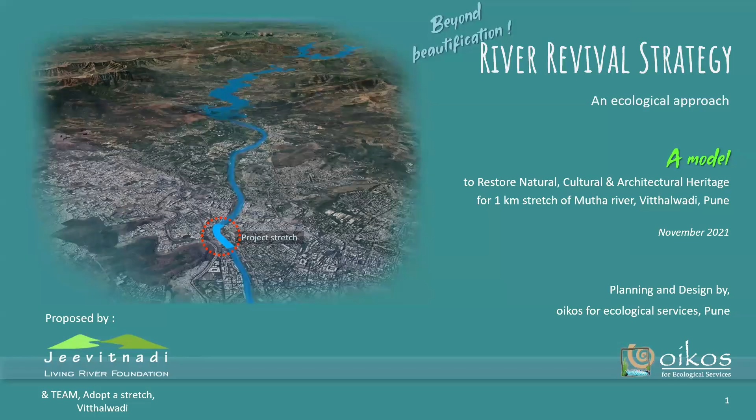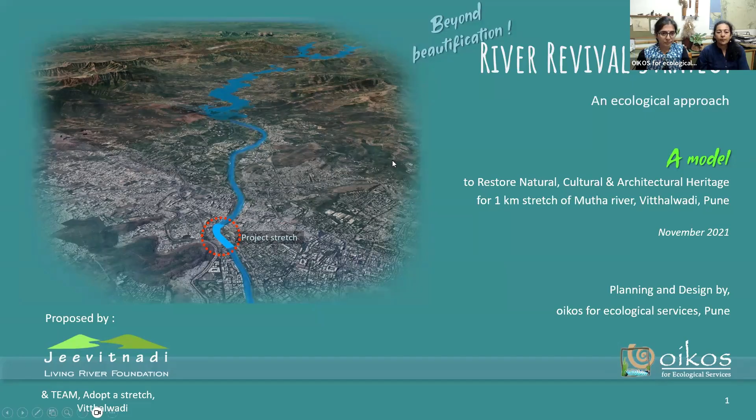So as Prajakta was briefing, this is about a river revival strategy with an ecological approach. What we're saying is that this is much beyond beautification, and we wish to show a model where we can restore the natural, cultural, architectural heritage of Pune for this 1 kilometer stretch that we had selected along Mutha River near Vitthalwadi. I think we'll skip a few slides because we have kept this entire presentation on the PRR website as well.

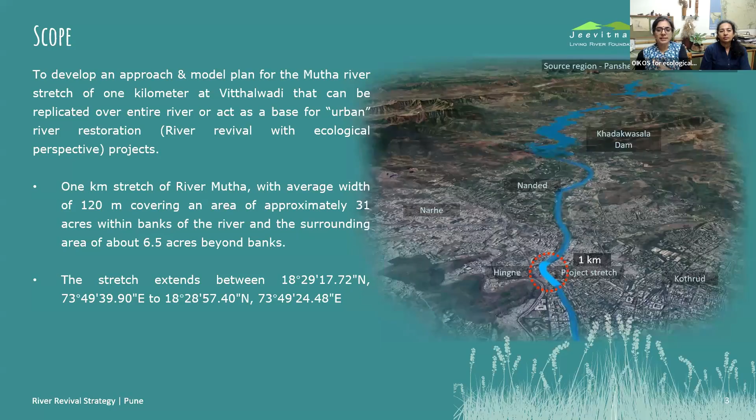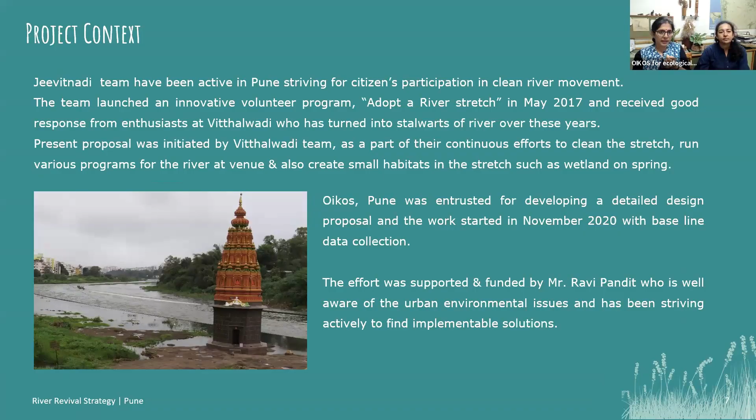This presentation covers some background and introduction, then why the river is important as an ecosystem. This is very important before we propose any kind of master plan, because once you have a very solid foundation in how you look at any particular ecosystem, only then are you able to design the right kind of strategy for its revival. Then we'll talk about the ecological assessment of that stretch, and then river restoration, which is a proposed design. I'll take you through the ecological assessment, and then Manasi can talk about the design. As I said, maybe I'll skip a few.

These are Vitthalwadi volunteers working at the Vitthalwadi stretch, cleaning, and along with Aditi and her team, we also tried to restore one wetland over there. It was a spring that was a little contaminated by the sewer there, and it was not reaching the river. So all these volunteers made it into a flowing channel, and it was nicely connected to the river. So this is one little habitat that was restored. If any of you wish to visit, you can visit this little habitat too.

So our vision basically is to consider the river as a natural entity, restore the natural zones of the river, and also restore the feeding streams, because that entire thing is basically a river ecosystem. The objective is to present a proposal for a river revival strategy based on an ecological perspective that includes these objectives. Basically 5 things are there: consideration of the river as a biological and living entity; stop, avoid, control solid and liquid pollution; restore the structure and functions of the river. Both things are very important.

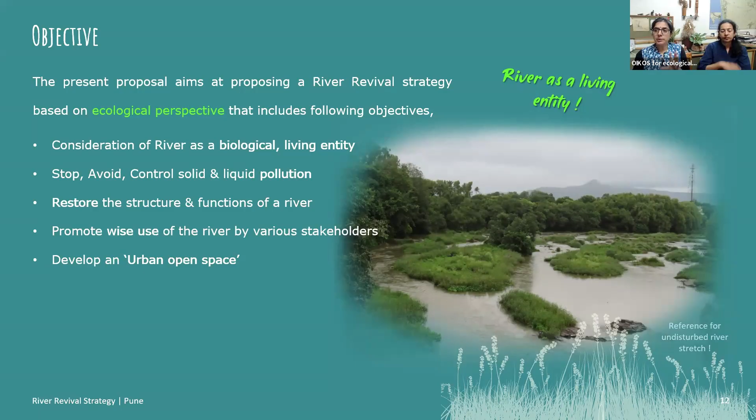And promote wise use of river by various stakeholders. That's also very important. And develop an urban open space, which is very important from citizens' point of view. And there would be n number of benefits for both human beings as well as non-human beings: education, recreation, reduced risk of floods, fresh air spaces, obviously natural greens canopy, and also this will be addressing some kind of climate resilience, because we are right in an era of climate change.

Yeah, so we studied this entire ecosystem over 6 to 8 months. We have literally made a grid along this 1 kilometer stretch, and studied the observations with respect to biodiversity along this stretch. So coming to this river, just understanding this as an ecosystem, it is connected to the source region, and also it is connected to the downstream. So these are basically 3 main zones: source, plains, and mouth of any river.

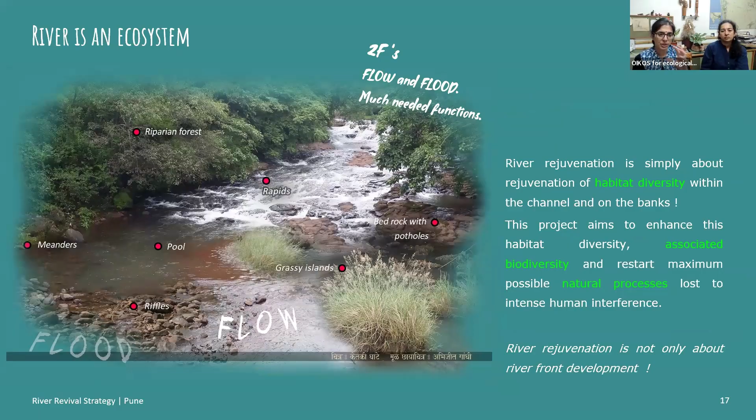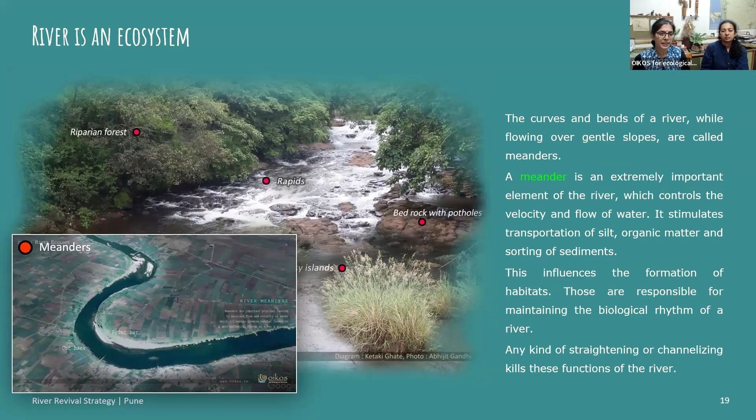And it is full with many such habitats as you see on this particular slide. So various habitats are there. There's a riparian forest all along the river. There are meanders. She carves out beautiful meanders on the plains. Then there are such kind of very tiny habitats like riffles.

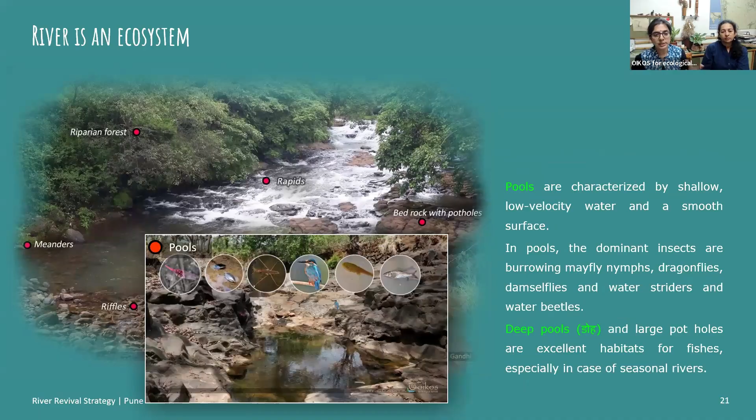And each of this gravel or cobble is very important as a habitat. Then there are pools, and they are full with n number of non-human beings. Then there are rapids, as you see in this photograph. There are potholes, there are wetlands and islands.

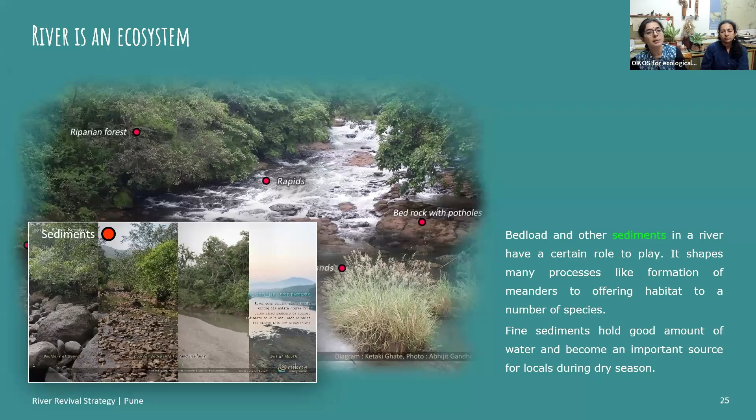So in short, any river is full with different kinds of sediments, sizes of sediments, and that's how you need to consider her as an ecosystem and then treat each habitat very cautiously. And that's why ecological assessment and analysis is very necessary before you go towards planning. So ideally, you can't really design one particular stretch of a river, but you need to design a policy and design for the entire catchment actually.

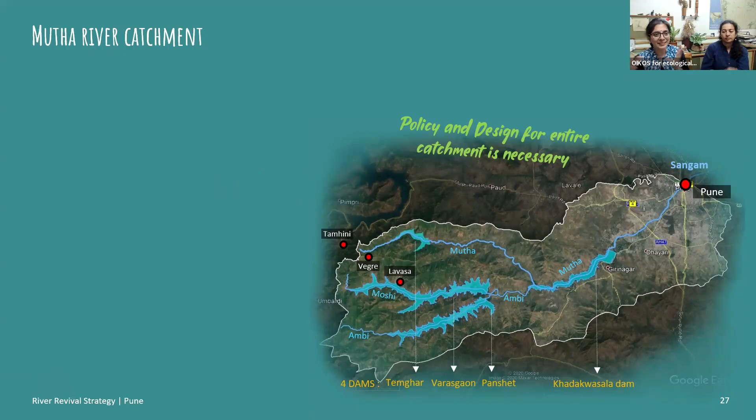But whatever, we have only this river, and that's how government looks at it, a particular section of a river. So looking at Mutha, it originates in Vegre village in Western Ghats, and it meets River Ambi near Dauze, and then it goes into Khadakwasla and ultimately enters the Pune city limit.

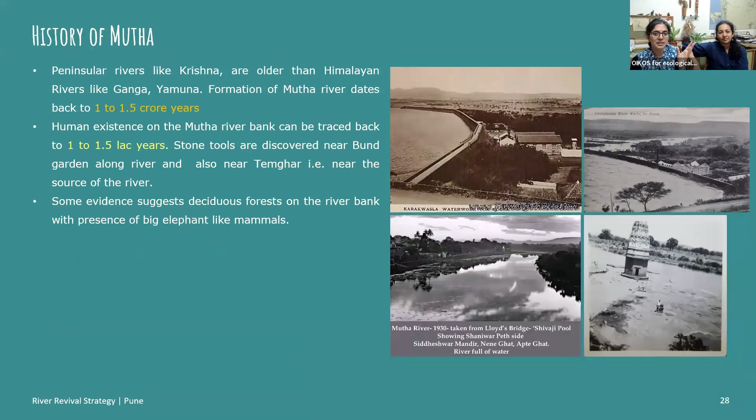So I'm going to skip these few slides again, the history of Mutha. So Mutha is a very old river. You can read many interesting stories about the history of Mutha, if you wish to add anything to this. Yeah, so as you said, it's a historic river, and it was instrumental for Pune to be Pune. So that's what I just wish to add.

Okay. So then the transformation from the origin of the river till the urban landscape is very, very stark. Up there in the source region, in her catchment areas, it is fairly clean, I must say. And as she enters the city, it starts getting dirty, and even the solid waste gets dumped here. So obviously there is an urgent need to repair this, and obviously there is also influence of the dam. It's a completely different subject though.

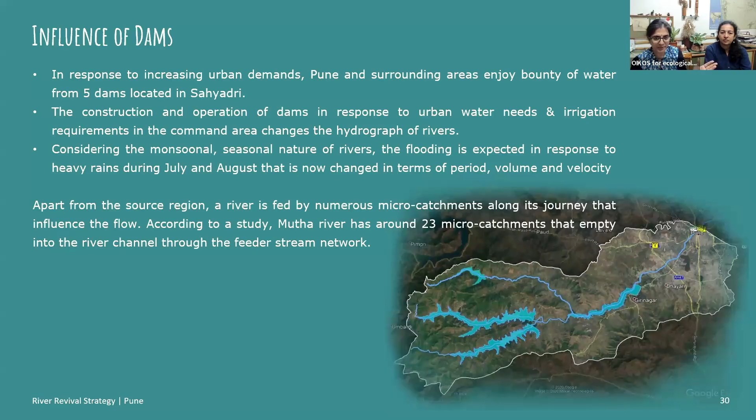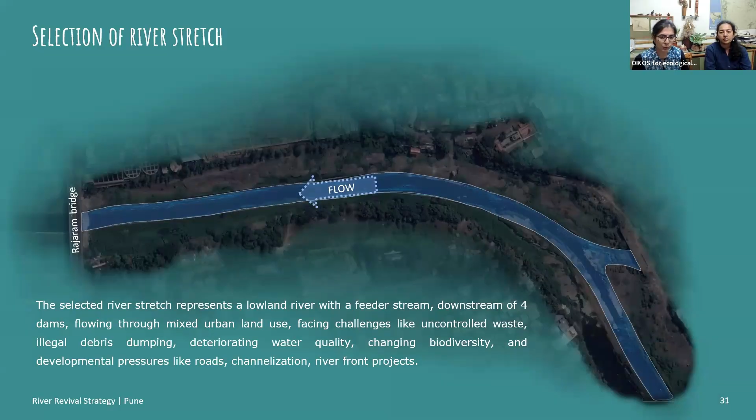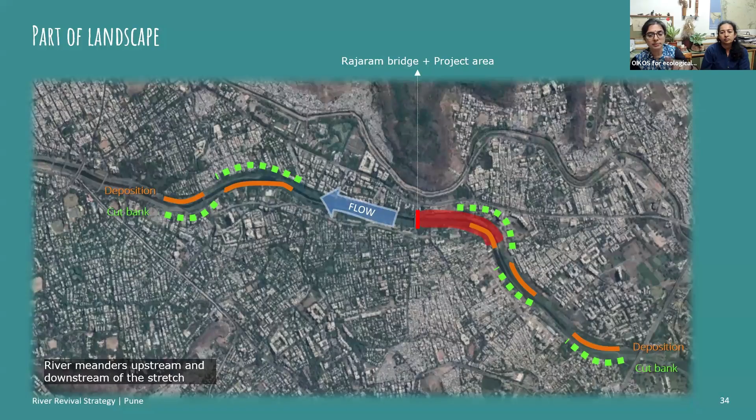So coming to the selection of our river stretch, this is Vitthalwadi stretch. You can see Rajaram Bridge on the left hand side, and this is how the flow is. So these are actual banks. This is eastern bank and this is western bank, and we did this assessment over 6 months. So it's very fascinating to look at the historical imageries of this particular stretch. You can see all these green dotted stretches, we call these meanders, and this red is the stretch that we studied.

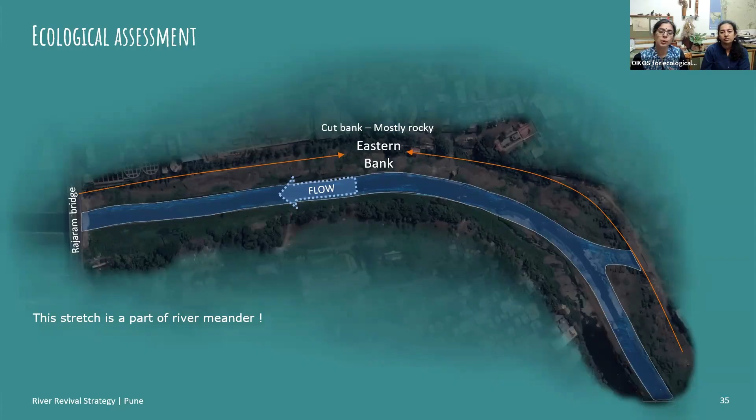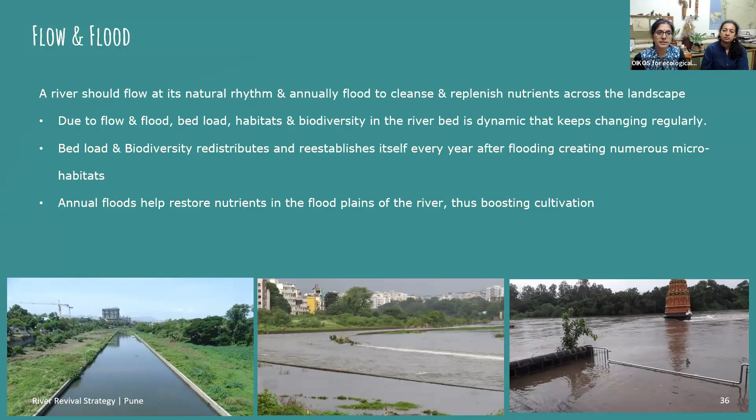So if you see, we call this cut bank. So the outer bank of the river is called cut bank because the flow keeps on eroding that particular side, and it deposits on another side. So that's why it is called depositional bank. So flow and flood both have been basically shaping this kind of channel over years. And this is a very stark difference.

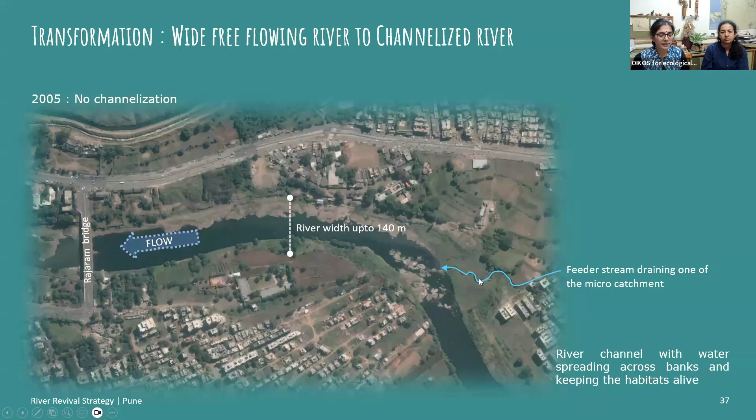So in 2005, you can see there was no channelization and river width was almost 140 meters. There was one feeder stream here and maybe some kind of rocky boulders. All these various habitats that you can see were alive. But in 2009, partial channelization was done and 140 meters was constricted to 30 meters, right? And here there's one wetland which is of 70 meters almost. Yeah, even then this was yet to be channelized.

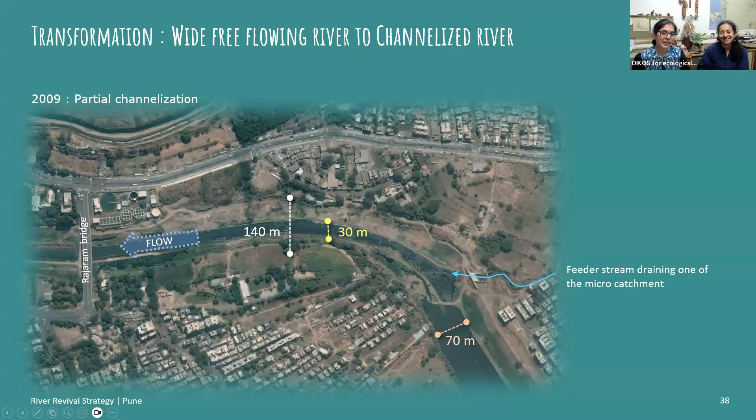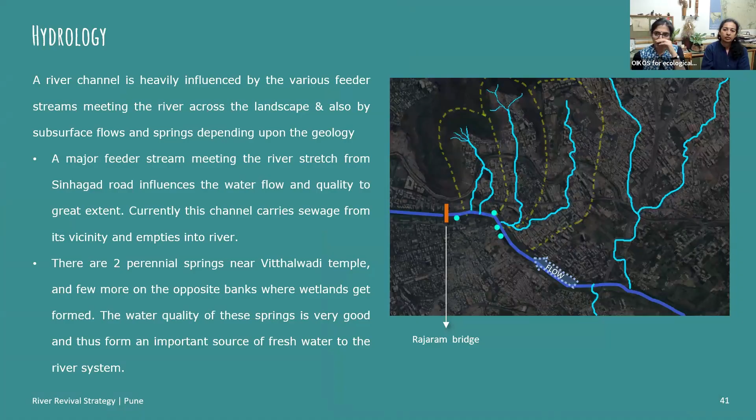So this is what the channelization has done to the river. Earlier, the river was full of habitats, now just one particular channel. And the rest of the habitat obviously became dry. So this is what the hydrology is. There are multiple streams and springs which are meeting this particular stretch.

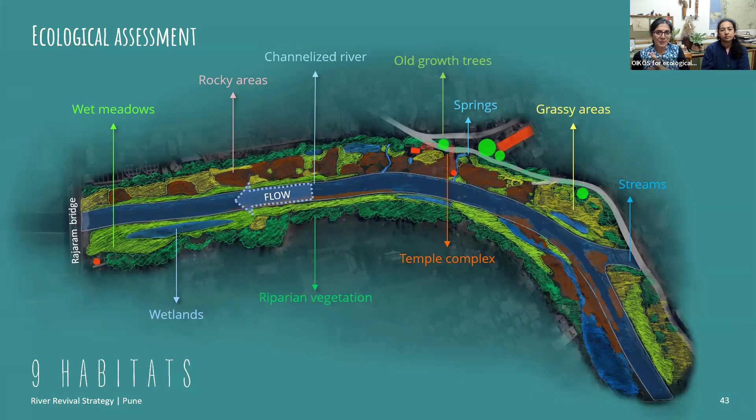So just to add, this pied kingfisher is seen in very few stretches. You can't see it in very heavily polluted areas. Though this part is polluted because there is a good amount of population upstream, this is not seen everywhere. So some indicators are there beyond whatever pollution is there.

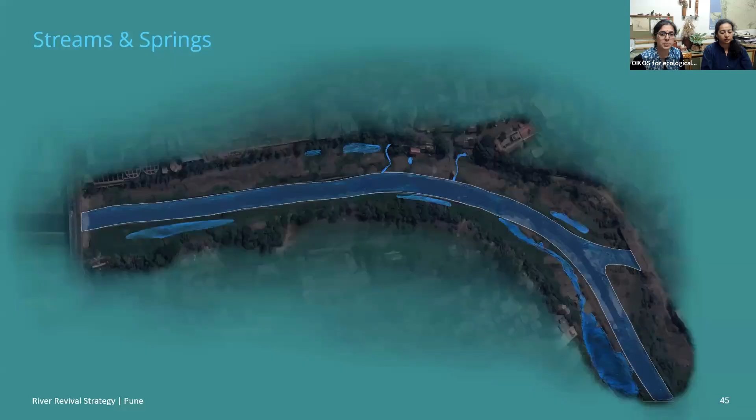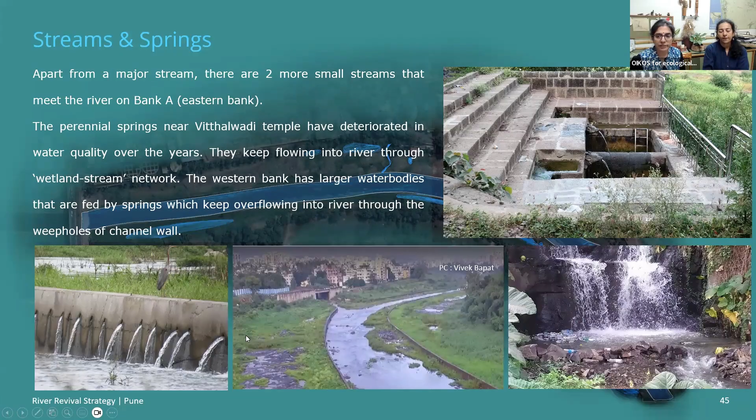Then there are streams and springs, as you see in this image, and they're a very important part. And this was the kind of kunda which is there just outside Vitthalwadi. And as I was telling you, along with Aditi, we tried to restore the wetland below this. And these are the weep holes that you see. So all this definitely can be restored.

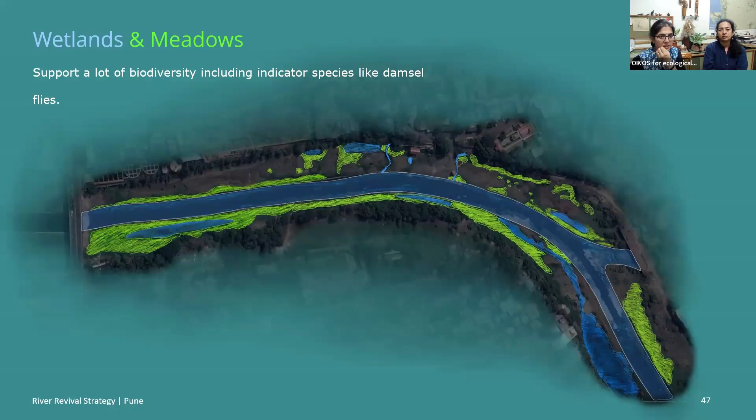And this wetland and meadows are together actually. So whatever shallow water body is there, right now it is colonized by certain plants. As you can see in this particular photograph, polygonum is one plant, in Marathi it is called paral, which is most dominant here. Actually, this can have a diversity of plants, and that's what restoration is. Restoring all that diversity becomes our objective.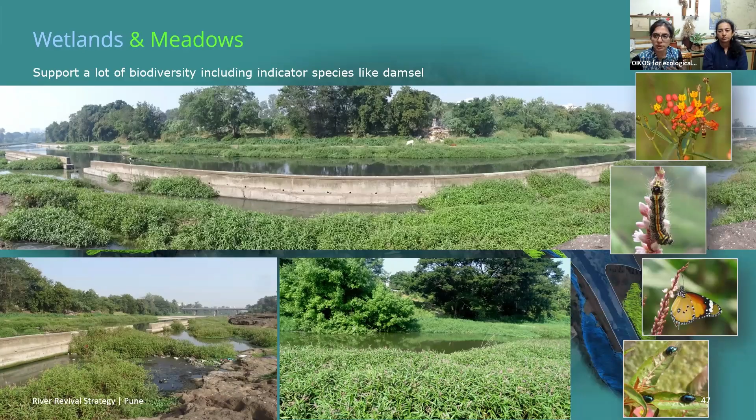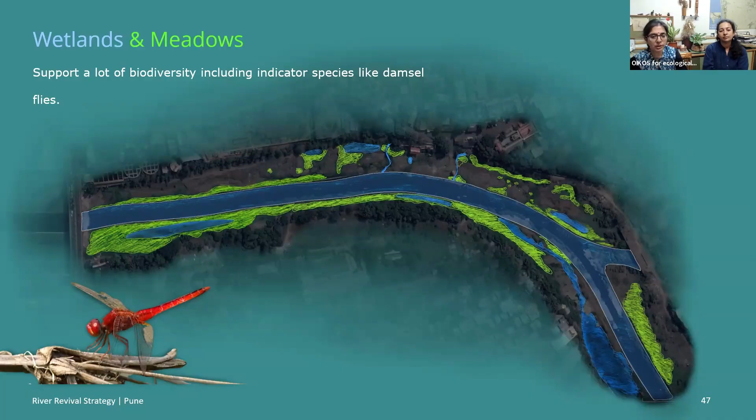And right now you can see much of the fauna, beetles and caterpillars. This first photograph is Halad Kunku. It is also a milkweed, which is supporting some kind of tiger butterfly. And certain dragonflies were also there. Dragonflies, we say, are a good indicator. They are actually the apex predator in any water body. If they are there, their larvae also control the mosquito population. So that's why such animals are important.

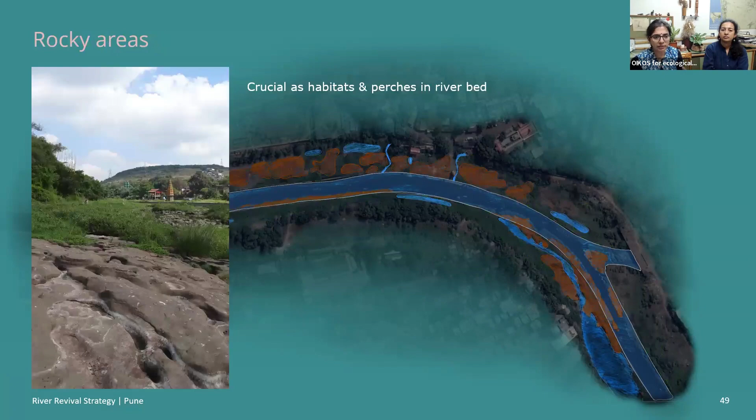And the rocky areas are there. They are also very crucial habitats and perches in the riverbed, and we could see many birds perching here. One of our team members got a wonderful photograph with a pond heron, a lapwing and this black-winged stilt in one frame, and even a little lower, a sandpiper. So the areas in between, which are like small rocky islands, are very useful for the fauna. Whenever there is channelization or high water, these habitats get submerged and then there are no such perching sites.

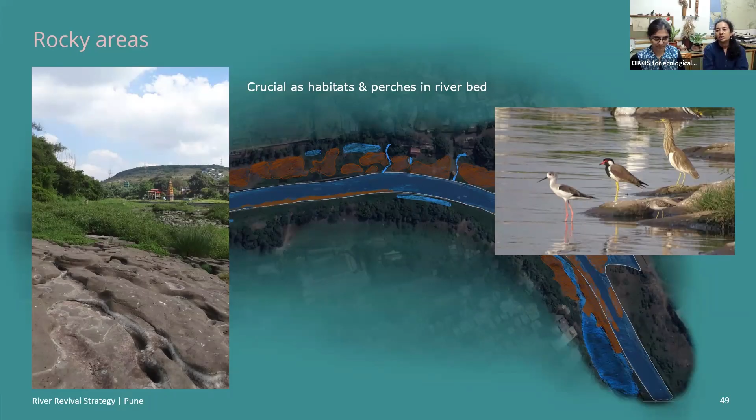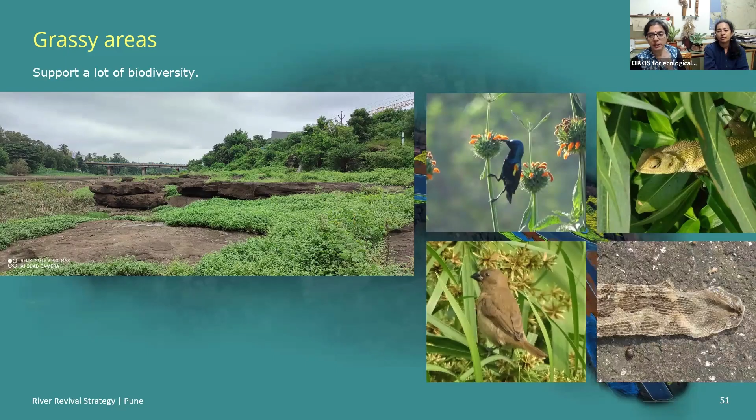And then the rest are grassy areas, and grassy areas also support a lot of biodiversity. As you can see here, birds are there and reptiles are there. Many are coming to feed on grasses. We have also spotted many snakes and their skins. So basically a lot of diversity is also there in these grassy areas.

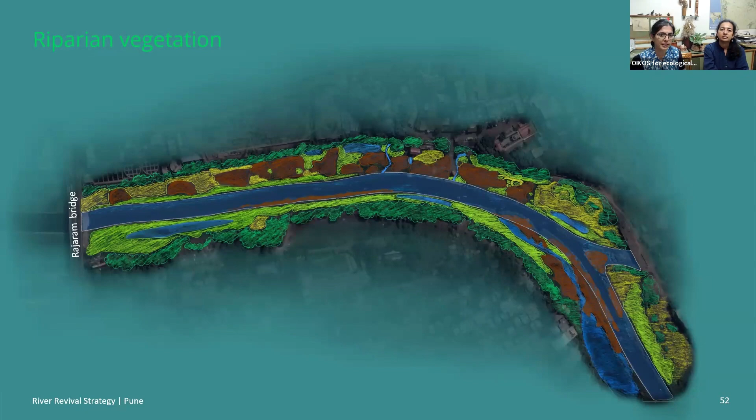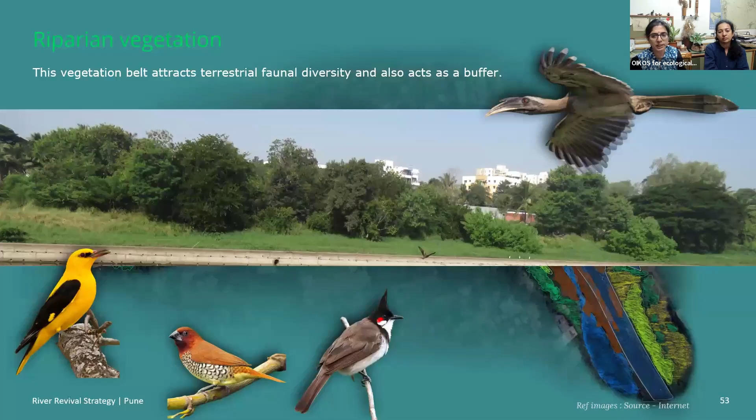And the last is this riparian zone, actually second last. Whatever fragmented riparian zone is there, we could see a good diversity of terrestrial birds like orioles, munias, bulbuls and hornbills. And in that there are also a few old growth trees, really large trees.

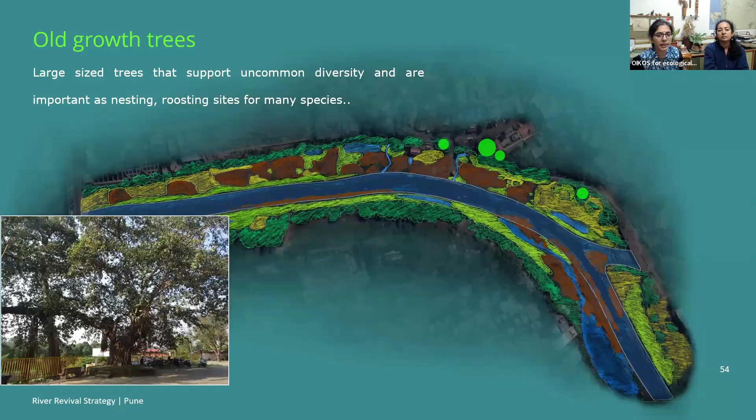Basically, umbar and pimpal are there, and wad, the banyan, is also there, and all these are almost keystone species. You remove them and you lose a great diversity of birds and other animals. So all these umbar and pimpal are there all along this stretch. We also could spot this Hariyal, which is our state bird. This is grey-fronted. Grey-fronted.

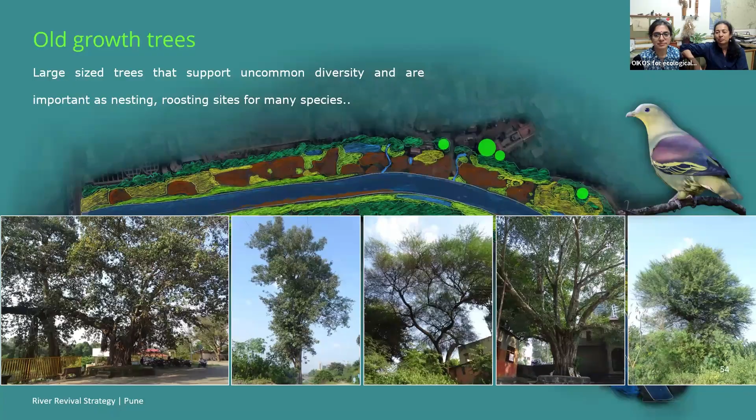So it's very uncommon to have this bird in our area. Fortunately, there could be some corridors which connected it to this stretch. So we were very happy when one of the team members from Jivit Nadi spotted this here.

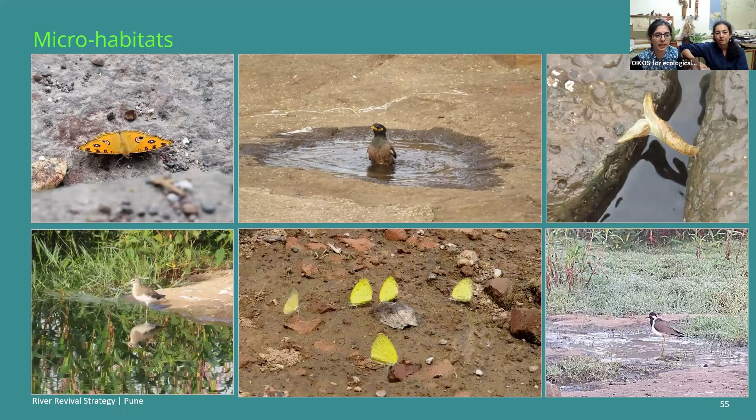And then n number of micro habitats are there. I think we can just go on speaking about the ecological status, but this is just to show you a glimpse of all the tiny habitats, whatever are there. They're full of diversity.

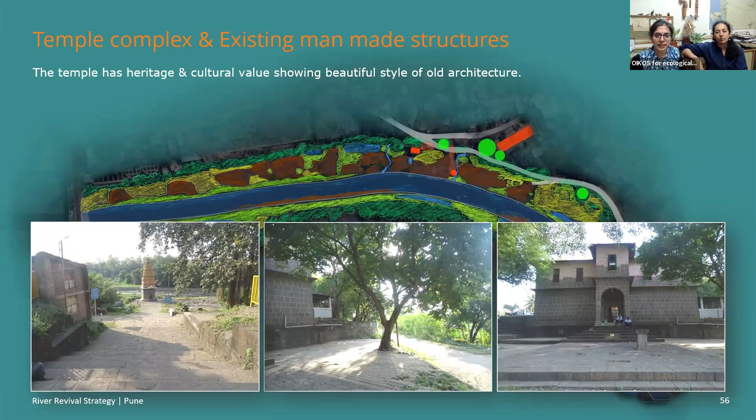That's what we are saying, that we need to actually mimic this kind of architecture along the river. Instead of completely new embankments, can we just mimic these structures, whatever are there, which are made out of lovely basalt dressed stone? This is the diversity.

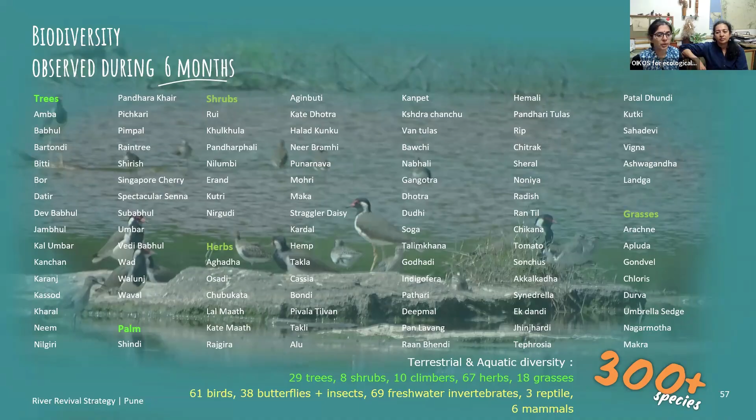Almost more than 300 species are spotted within just 6 months, in just 1 kilometer. So all the species are there, various groups, taxa, are written here, and these are all indicators, spotted particularly at this different habitat.

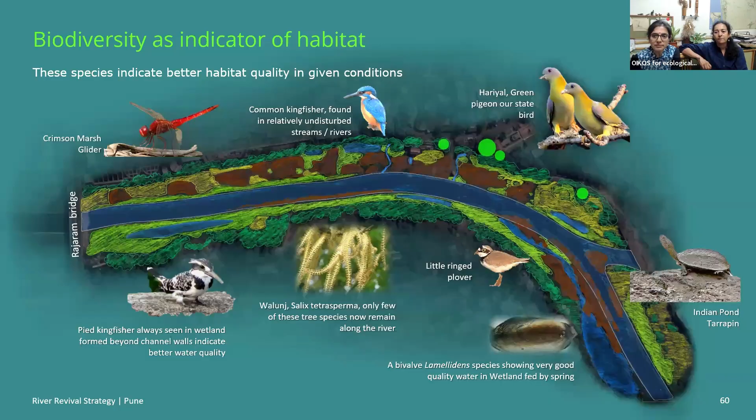So this is Hariyal. This is our state bird, actually. And then these are just certain documentation that we did while we were doing the survey.

And we also could document the human use. There are certain shepherds who also come during a certain time in the year, and they make their sheep rest there for a day or two, and then they walk away. Then there are dhobis who use all these rocks, and there are fishermen too.

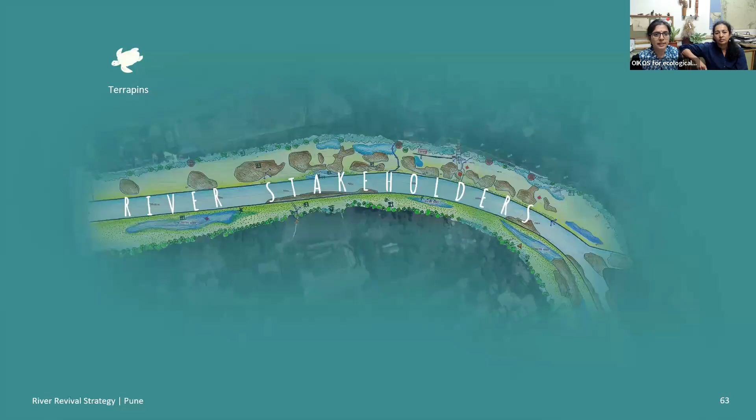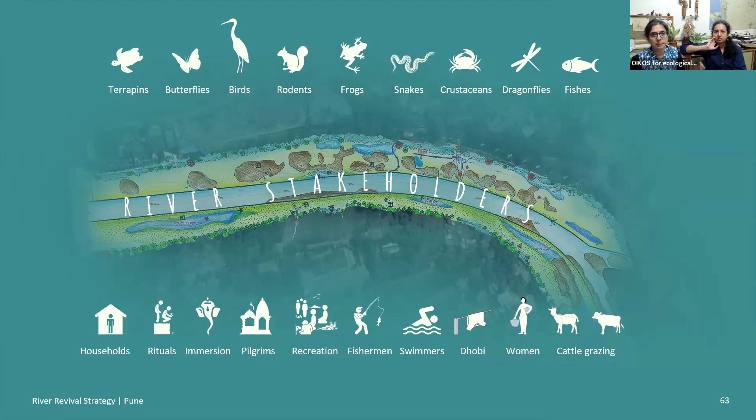So all these are also stakeholders, is what we see. So these are different stakeholders. All non-human beings are on one side and all human beings are on the other side. So we say that ultimately our design should be inclusive towards all of them. We can't really displace any of them, but make space and facility for each of them.

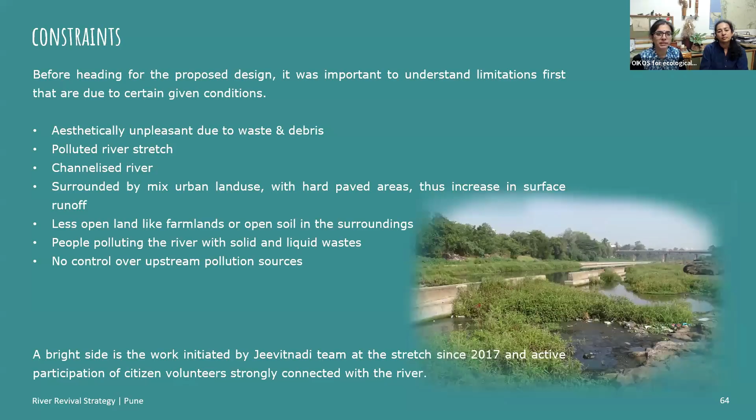And then there are certain constraints. This river stretch is already polluted, and from upstream there is a lot of pollution coming inside. So there is no control basically over upstream pollution sources. But even then, we try to develop some kind of a model stretch.

So from here onwards, we talk about the design, like what all things we consider. So after we took all the on-ground realities on paper, we also studied the DP and surrounding area - what is planned by the government, what is the land use in the surrounding, and can our design be in tune with all these requirements or whatever is given right now.

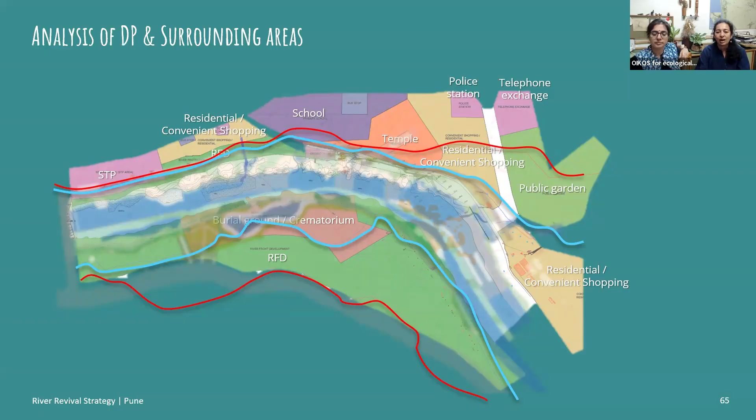So here you can also see the blue and red lines - I think all of you must be knowing about these, which are the 25 years and 100 years flood lines basically. We need to consider that also. We can't change them. Maybe there could be some deviation after 2020 or something, but that is yet to happen, so we can safely consider these lines right now.

So this is how the proposed design will look like. The main objective is clean and restore. So these are some of its sub points.

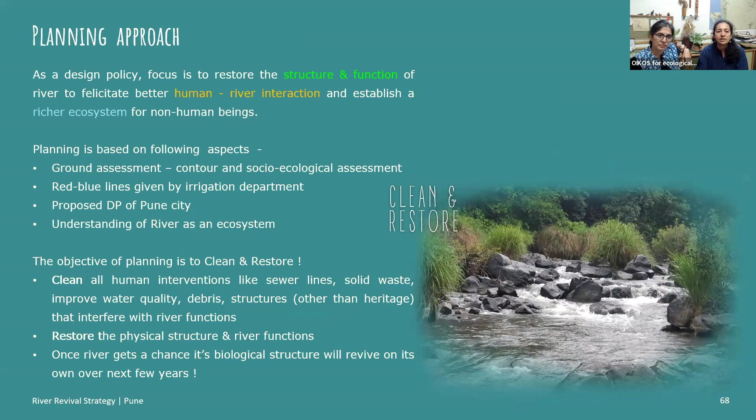The design emphasis is basically on maintaining the river cross section, so as not to reduce it, then have natural banks wherever possible. Now in the city we already have some constructed banks, but wherever possible we try to have natural banks. Then widen the channel, because the channel has been built inside and has restricted the river. We have to widen it so that the flood can be accommodated within the river channel, and enhance the citizen experience. So these were a few of the things.

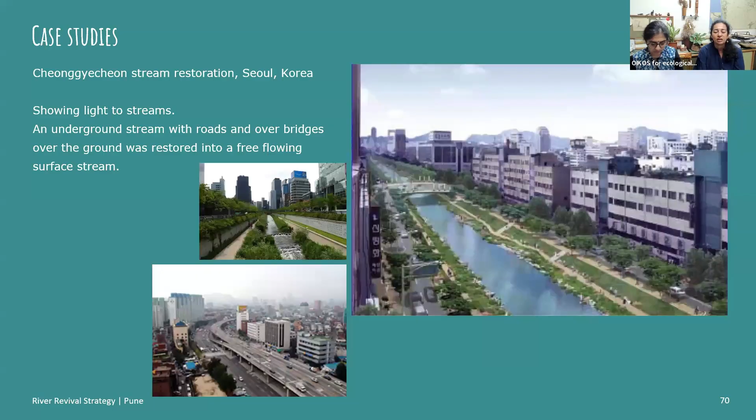We also studied some case studies from across the globe. So this is one stream restoration in Korea. You can just Google these things - I'm giving you some pointers, but beyond that there are many such case studies which are really good and show us the paths to work on these urban rivers.

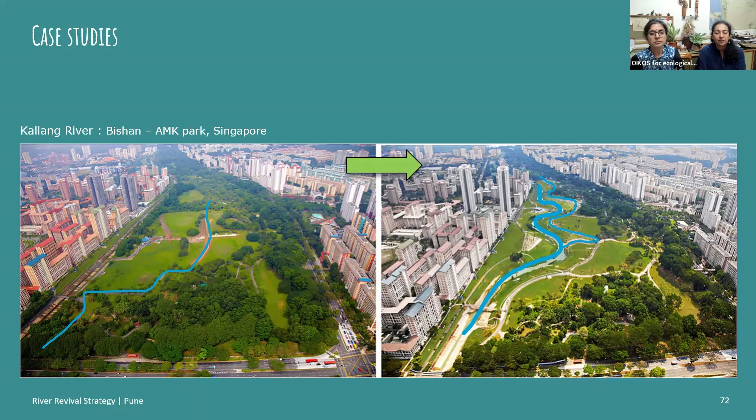So these were some case studies, and we could also enumerate various benefits of having such ecologically informed design.

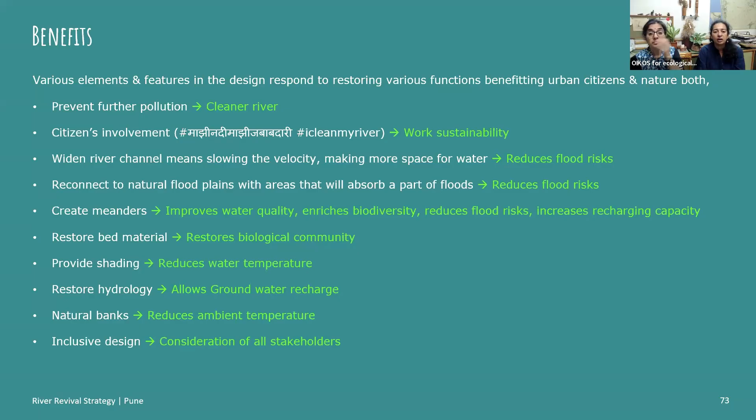In planning, we have considered these four river functions. First is respect the blue and red lines. Second is restore the physical structure of the river, then restore biological structure. One way is that when you restore physical structure, the biological structure can follow it, aligning itself within say 5 to 10 years down the line. But we can also accelerate it by certain design elements. Fourth is recreate the citizen access. So we'll see it one by one.

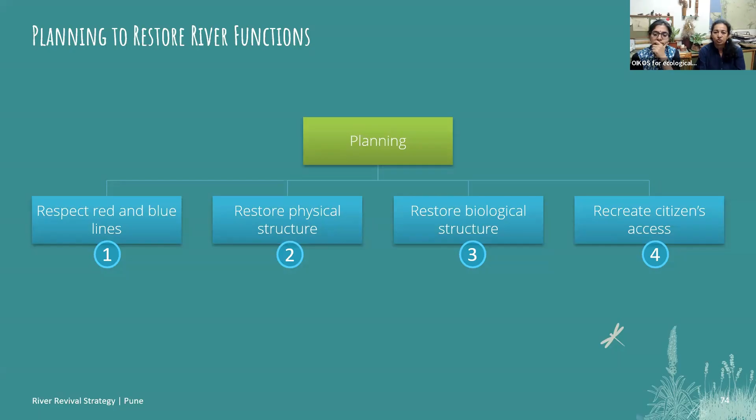This is the main thing actually in this design: if you look at the current riverfront development, it is accessible to citizens all along the river. We are saying citizens surely can access, but they can only reach the river through something like fingers, not all along the river. So most of the river is protected and some stretches are developed for citizens. That's the main thing.

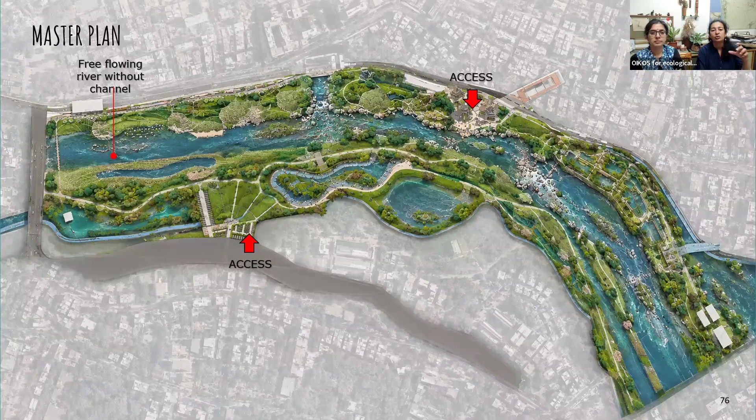Then we should have a free flowing river without a channel, so we can actually remove the channel selectively. That's what we have designed.

Then a pathway to walk all along—but this pathway is not a very beaten pathway like tar or cement, but more natural, connecting the rocky ways in between. Then we have waterfall improvement and wetland development, spring development, sit out areas, and we have separated two land uses here—both religious, but one for the temple and another for cremation. So we have separated those two uses.

Then riparian zone development, wastewater treatment, and wetland development within the channel. There is one stream coming and meeting the river which is really polluted, so having wetlands at the meeting point will be important so that we can treat that stream.

Then this is one wetland garden which can function as a flood control wetland. Whenever flood happens—right now whatever we are seeing in the river is flowing at its full capacity, not a flooded river, so it is flowing within its banks. That's the extent of our river actually. If we want to respect that extent, then it has to be at that point, and beyond that will be the flood. So whenever there is more rain, the river actually flows beyond its banks, and that is the flood.

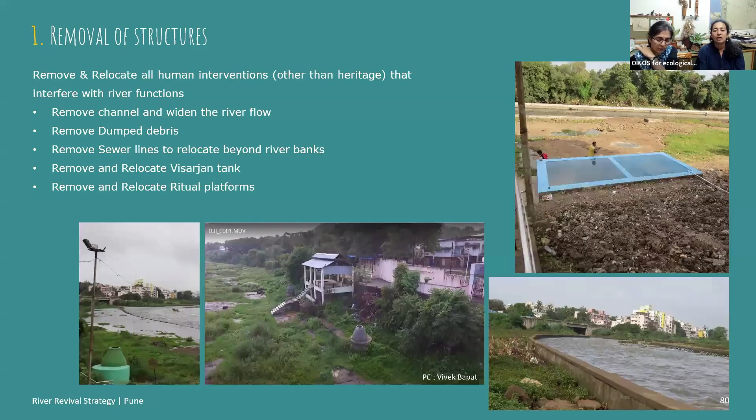So all these kinds of physical structures that have been added into the river bank should get modified, and we should have them relocated outside. Then widening of the river channel - right now the channel width is 30, and it needs to be widened so that we have access.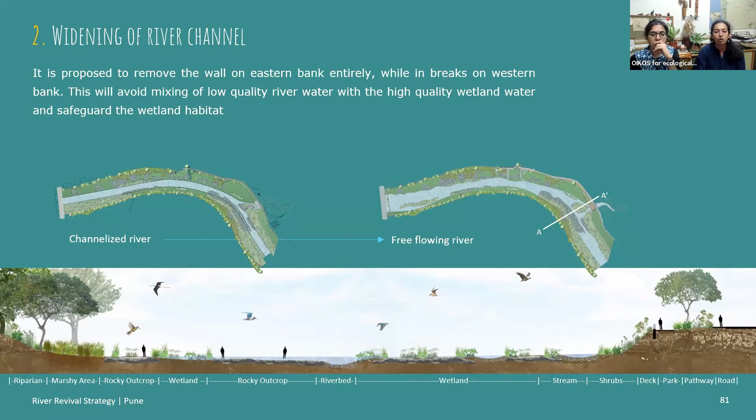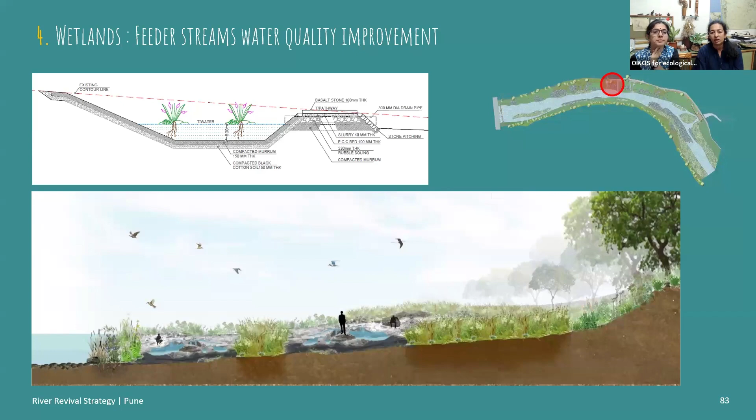Water is reaching the habitats, and also there is more area for the water to be accommodated. Then this is solid waste management at the mouth, at the meeting point of the stream, and at the Rajaram Bridge where people tend to throw things. Then this is a small feeder stream that comes in, where we can have water quality improvement techniques by creating wetlands and treatment areas.

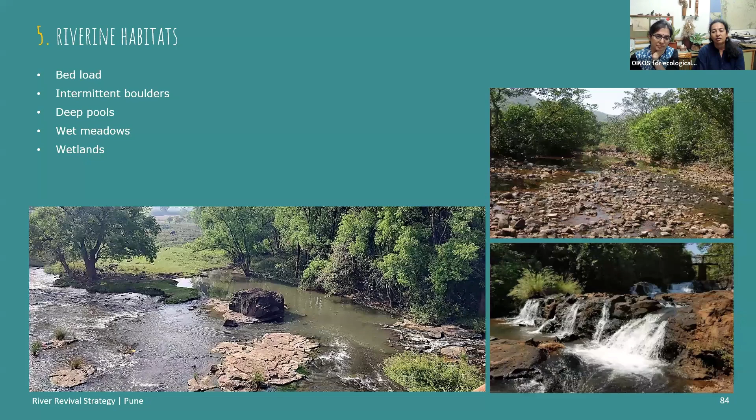So this is how these in-stream wetlands may look like if they are created. You can also see the pathways basically need to be very natural. So detailed designing is again a completely different task, but this is just to show you how you can develop a river in an ecological way. And these are almost 4 acres of riverine habitats that are in place in the design basically.

Then the third point is about restoring the biological structure, like developing the riparian zone. Right now, if you can see, this entire stretch is one riparian zone, but it is discontinuous - ahead of this you can't see any riparian zone, and here you can't see any riparian trees. It is discontinuous and has some non-natives also, so we can have strategies to replace them and plant the right kind of riparian species.

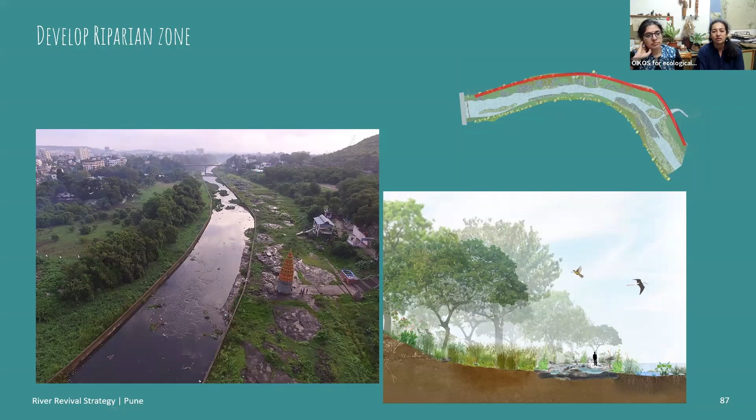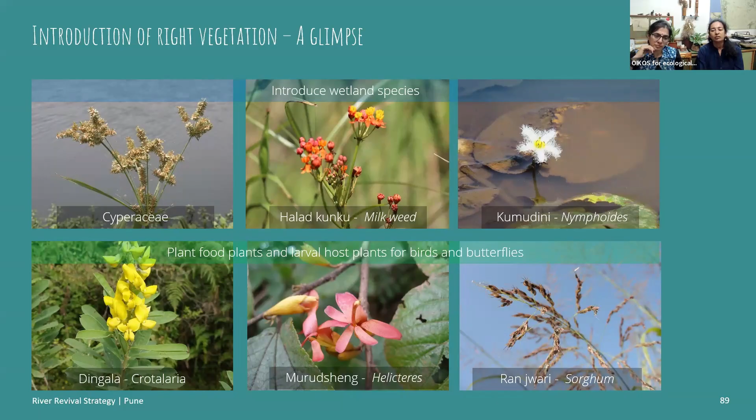So these are a few of the riparian species that can be introduced and planted here. Then we have the right vegetation not only at the edge but inside also, in the wetland areas or within the channel - some grasses, some sedges, some herbs that can also be good for the local fauna.

Then, recreate access for citizens. That's a very important point because it's an urban river, and we have been hearing mainly that since it is an urban river, we need to have citizens experience it, we need to have some open spaces within the urban areas which are very densely populated, so that people can have good recreation facilities.

So this is how we can actually connect people to the river, because unless we have people coming to the river, we can't expect them to work for the river. That's one of the key points with which the Jivit Nadi team is already working on - connecting people to the river, and then we can do certain conservation activities.

So these are certain points that we thought of including in the design. One is the temple complex with ghats, that needs to be maybe redesigned to have certain activities. Then a wetland park with amenities, that is on the other bank. Then a trail along the river which will connect the river to the citizens, and they can also enjoy the fauna coming in, or enjoy bird watching and all those things. Then a wetland observation area, a river crossover ford.

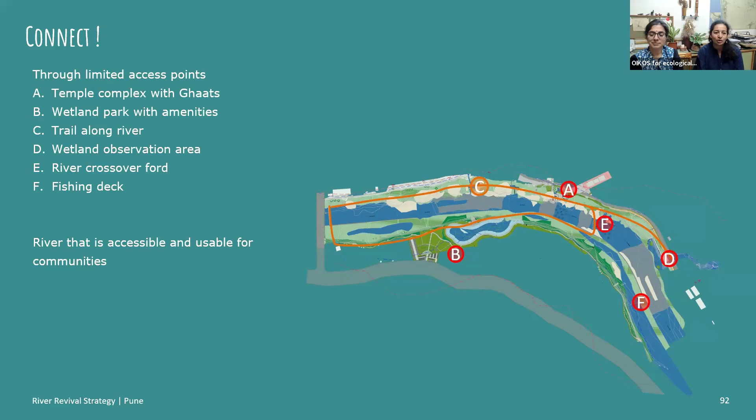So whenever there is low water in the river, like in the lean season, people can actually go till the river. They can cross through the river with a bridge or a ford, and a fishing deck of course - we have seen fishermen having a good time here, so there will be some urbanites also who can enjoy this fishing activity.

So these are a few glimpses, like the temple complex, which has been designed using dressed rock, keeping the cultural and heritage things in mind. So these areas could be used for certain activities like kirtan, or as already happening at the river, for lectures or talks, everything.

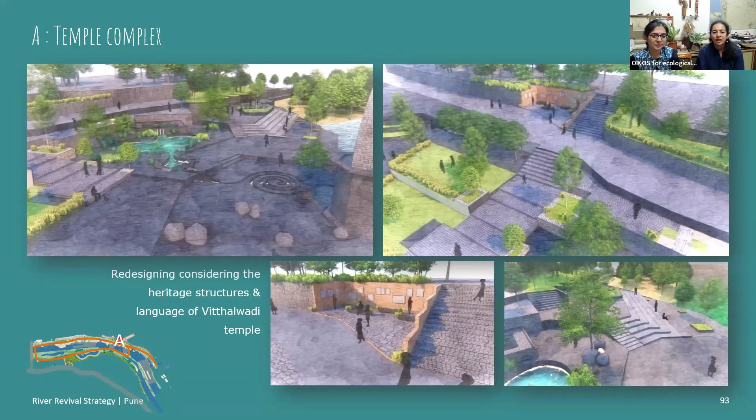Then this is the wetland parks, some glimpses of how it can be designed. There could be some pollinators that will visit the plants. There will be wetlands, so the birds can visit it. There could be n number of wetland species that can be introduced here.

So it creates nice amenities for people to look at the riverside wetlands, and also learn about these features and associations in those areas. These are just conceptual images that we have gathered from various projects done all over the world. Yeah, and even ours, few are ours.

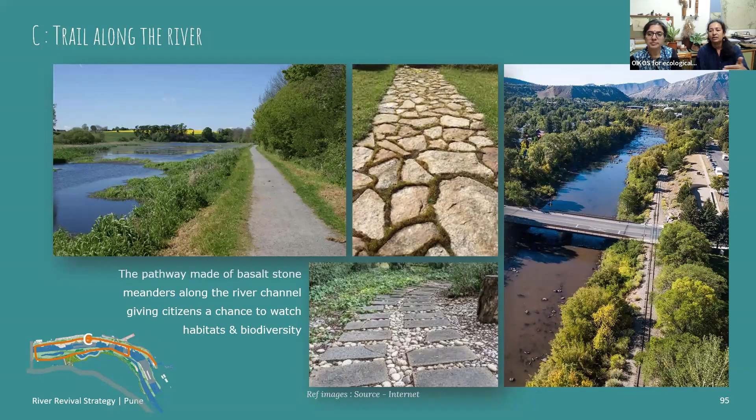So then this is the trail along the river. It's not a concretized thing, but using natural stones, more natural materials. So there are ample opportunities to have a material palette for that. It's basically a very natural form of a pathway that will connect these rocky areas on bank A.

Then this is the wetland observation area that we thought of, because on that stream there is a bridge which was constructed earlier when a road was planned, but there is no proper road on either side, though the bridge structure exists. So this can be used as a gallery, basically a viewing gallery for seeing that wetland which is being planned just below that bridge.

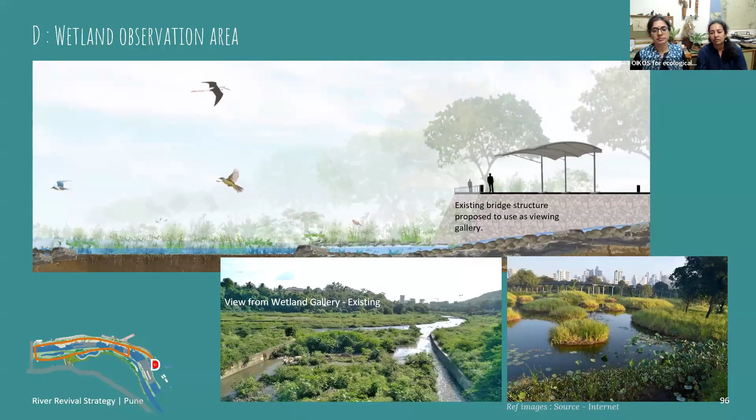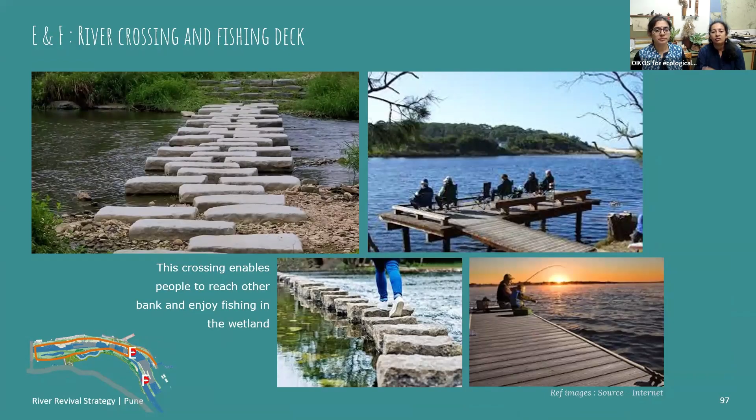Then a river crossing area and a fishing deck. That could be one of the highlights of this design, so people can come and watch these spaces and enjoy being along the river.

So yeah, this is like what we dream of this river - there are riparian trees, then in-stream habitats, and riparian patches.

You can see this small wall which is retained, which is the existing channel wall, but we have retained it at a few places just to ensure that the wetland beyond that wall is not contaminated with the existing polluted water. Because when we did the water quality assessment of this river channel stretch, these two wetlands had very good quality, showing that water mixing is not much.

So we need to retain that until the entire river is pollution free. We have retained certain areas for not allowing this mixture, and also those areas, like those paths, can then be used by people for walking or observing the birds.

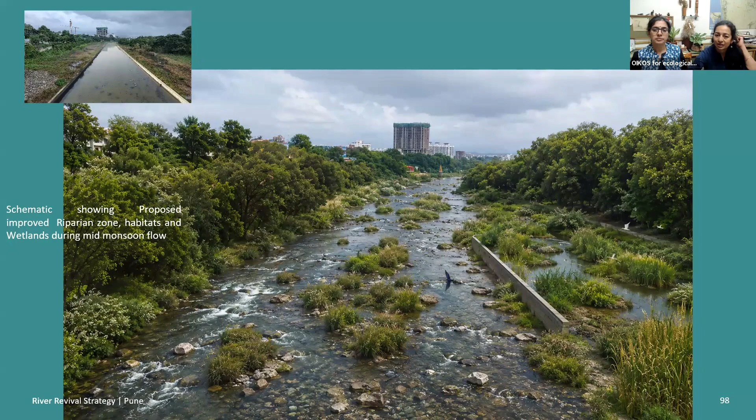So this is how the schematic of the proposed river stretch would look like. You can see the Kundalik Mandir also standing in between.

Yeah, so these are a few things that we have designed as an alternative, where it doesn't compromise on citizens' access but integrates the ecological aspects of this river channel. These are a few pointers that can be thought of beyond this proposal, and when thinking of executing this on ground, these are a few pointers that need to be understood. We hope that this will happen on ground.

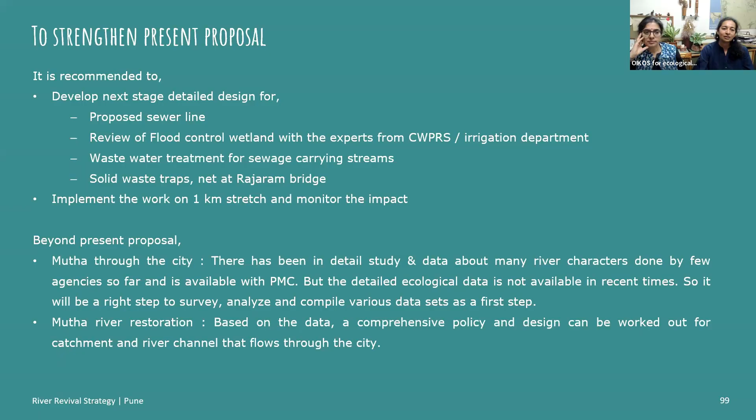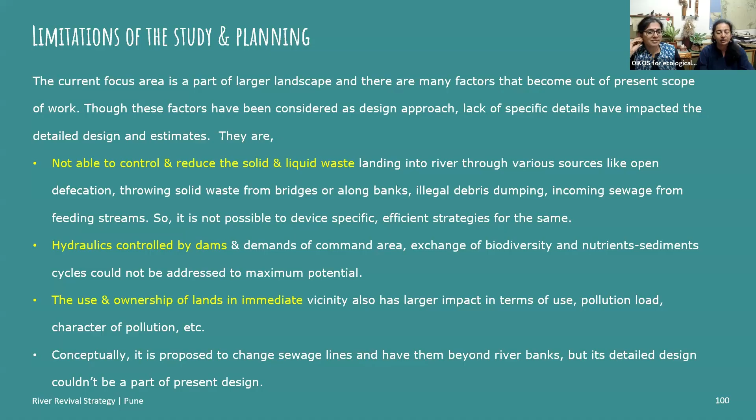Because we will also need other departments to work here - maybe CWPRS, PMC, various government departments, even for this one particular stretch that we have selected. So there are certain limitations of the studies too, whatever limitations we could think of we have enumerated. There could be some more, and some might come when we start implementing it on ground.

And even during detailing, because detailing itself is a very big and important stage. This is still at a conceptual level and definitely can be done, surely. So at some stage of the working drawing stage, it needs to be detailed out. Those in the group who are architects will understand this kind of language.